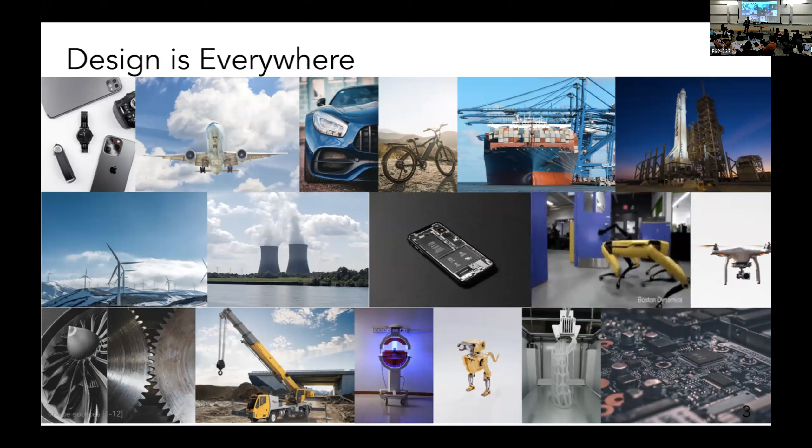If you look around yourself, you will see that you're surrounded by design, whether you took a flight to come to Boston, whether you're driving, whether you're biking here, if you use energy, you have energy solutions, wind turbines, batteries. All these products are created by someone who came up with a design for what it should look like, how it should function, and all the systems that go into place. A key question is, how are they designed and what role does AI play in it?

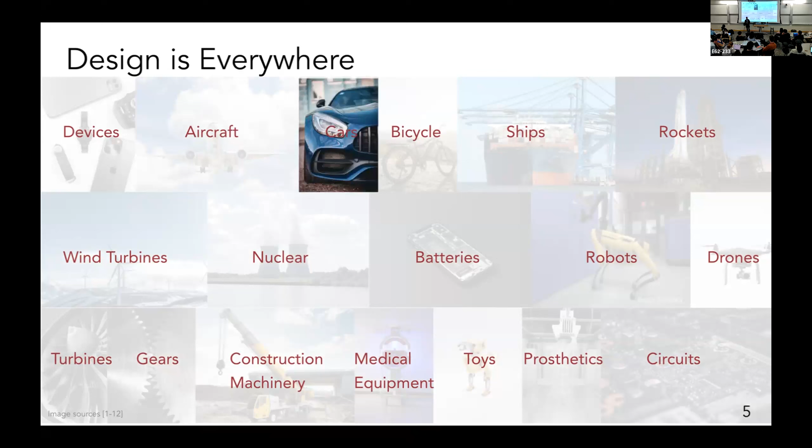So let's just take the example of one of these products, and I'll take cars, for example. I asked a friend of mine, Bill, how do you actually create cars in the industry? And the first answer was pretty much what we study in our design classes, the design process. You start with some market research, do early stage design sketches, then start modeling, simulation, go to the wind tunnel and test those products and iterate and finalize.

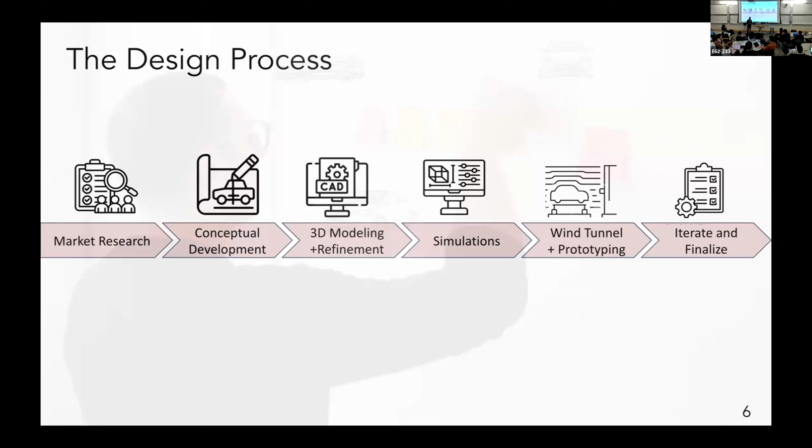But if you dig a bit deeper, Bill will tell you that the process is much more complex, and anyone who has done any serious design will relate to this: there's lots and lots of back and forth. In fact, in the car industry, they call this the devil's cycle. There's a good reason for that, because going from a concept to the product can take many years, 3 to 5 years in this case.

More importantly, because exploration is so expensive, every time you come up with a new sketch you'd have to really explore the design space, but people don't do that much. So they would tweak the design a little bit and use the ones that were there before. This leads to innovation loss, difficulty meeting requirements. And there is research showing that 70% of the life cycle costs of a product are decided by decisions taken in early stages of design.

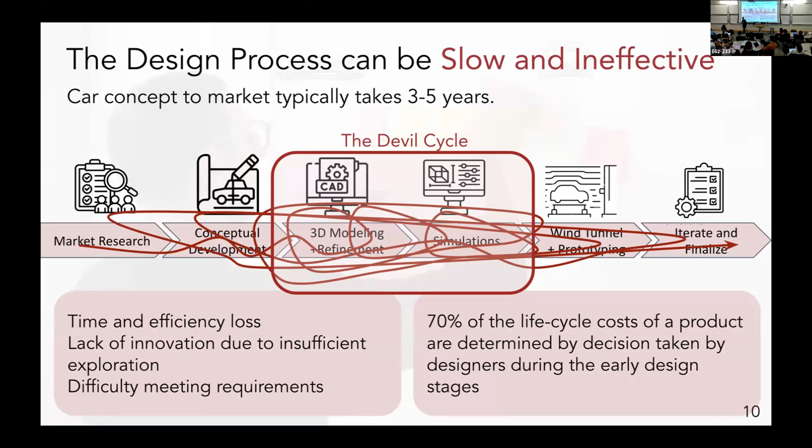And this is not just about the car industry. For any product we're designing, the early stage decisions we take have a huge cost implication, and exploration is expensive.

So since we are working on AI, our natural question is: how can AI enable humans to create better designs faster? This touches on a lot of sectors, from aerospace, automotive, energy, shipping. Some people would ask me, what is better? And this is critical because you have to define better. For someone it might be cheaper, for someone more sustainable, it might be faster, or other values like a better looking product and so on.

The more important thing is that these models are not new. Generative models have been around for decades: mixture of Gaussians, topic models, and so on. But what's new is that now we can learn much, much more complex distributions.

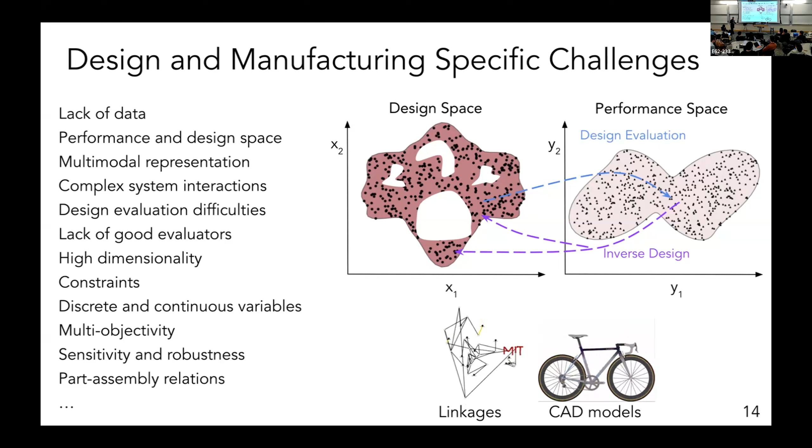There are other challenges like understanding engineering performance, what physics is at play, what the design space parameters are. Humans don't think in a unimodal way. If you're designing a product, you're speaking, you're looking at visuals, you're thinking in different aspects—multimodality and so on. So I want to go through some examples where, despite all the hype, we see promise and where work needs to be done for the next generation of AI to be capable for shape, design, and manufacturing.

I divide it into three parts. One part is AI helping humans solve problems that humans are already doing, and pretty much not using a lot of AI today. The second part is AI helping people solve problems where current models are good enough, but you can do much better. And third is where the current models can't even solve the problems, so we can solve problems that were not possible before.

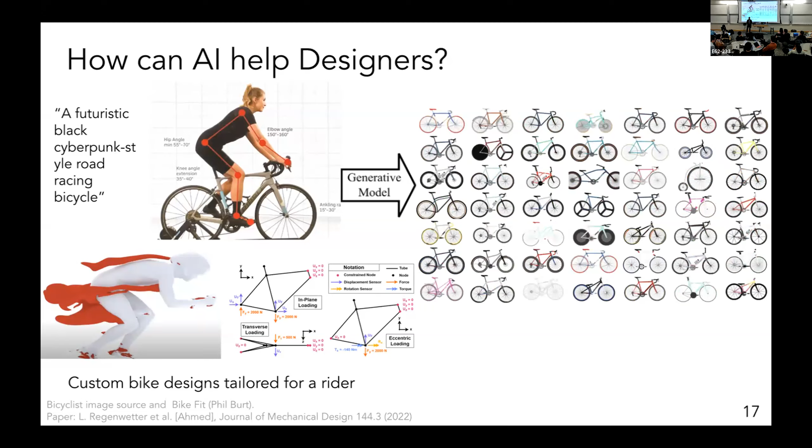So the first case is bicycle design. We collaborated with a company called BikeCAD. Globally, a lot of frame builders use this CAD software to design their bicycles. When we started looking at designs, we found that we wanted to enable AI to create designs for people, but it was not trivial because people have very diverse requirements. You might say, I want a bike which is lighter and more ergonomic, but also a black cyberpunk style road racing bicycle.

Here we are not generating images—these are CAD models, renderings of CAD models. So should I change the saddle height of my bicycle or should I change the color to meet these requirements, but also all the physics requirements? You want it to be stiffer, you might want it more aerodynamic, so we're running simulations. We started looking at it from a combined learning and optimization perspective, and multimodal learning plays a big role.

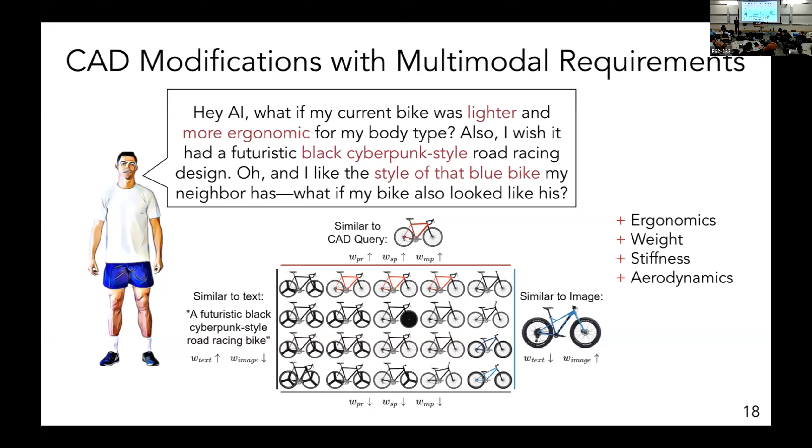The other thing we started looking at is, can generative models be an AI design assistant? When we talked to people, sometimes designers are lazy—they go to the CAD software and design a part of the CAD model, like the frame, and say just complete it, auto-complete it. So what we did was train models on past data.

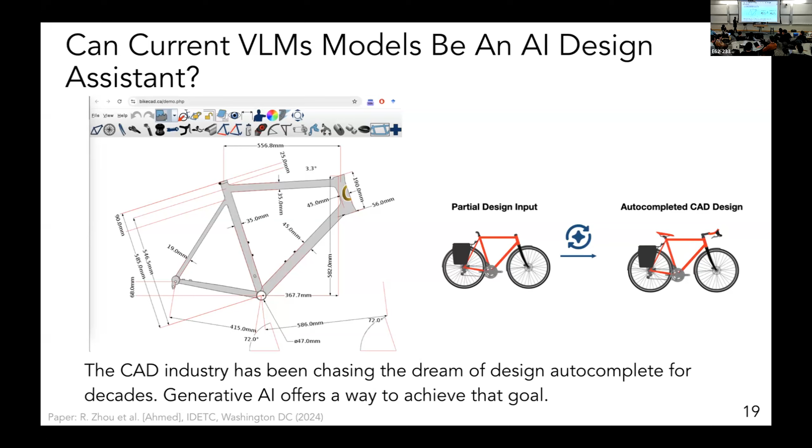These are diffusion models. They work on Excel sheets, where you imagine some columns are missing, and the diffusion models can fill in those values. They are also guided by the structure of the bicycle. With that, you can give incomplete bicycle designs, and this can complete 3D CAD models of different types of frames with exact measurements and so on. Once we have that exact parametric value, you can generate images out of those.

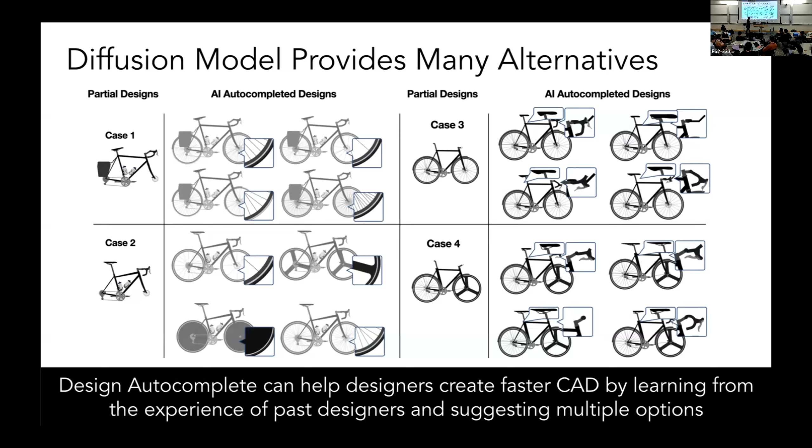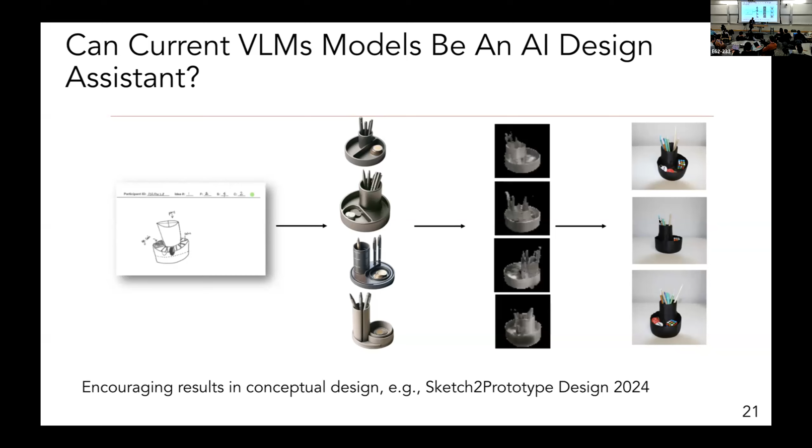Other use cases—thinking about how AI can help humans design, like people design sketches in our classes. We've shown some prototypes where you can go from a sketch to a physical prototype, by going from sketch images, to 3D models, and then correcting for manufacturing defects and so on. This is still early stage because I don't think the spatial understanding is there yet, but we already see some encouraging results.

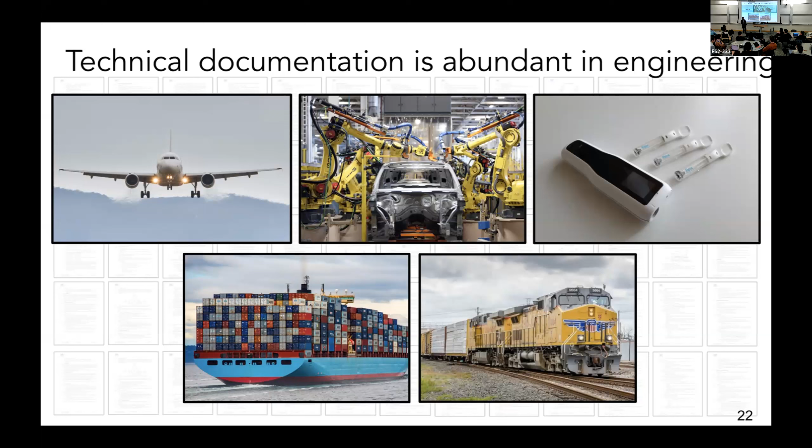The next thing—if anyone has done design, I think one important thing when we think of AI as a designer is it should be able to design and follow real world rules. How many of you have done a design where you had a thick rule book, where you had to go to rule number 1.3.5 and so on? Most technical documentation, whether in aerospace, automotive, medical devices, shipping, or trains, has hundreds of thick documents, and all those rules need to be followed when designing products.

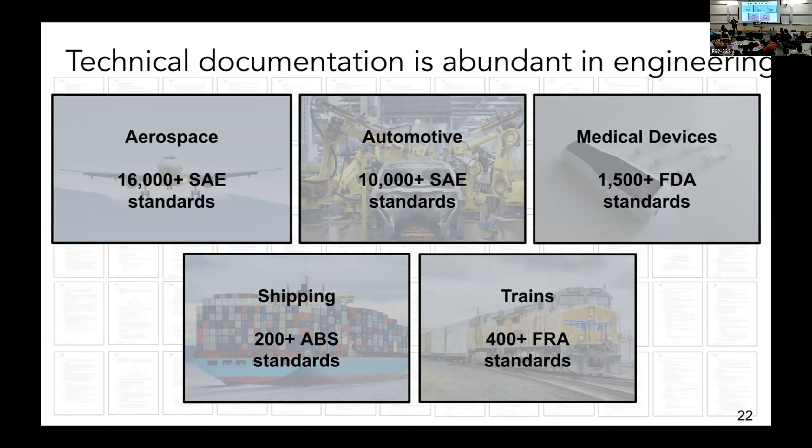So we asked ourselves, if AI is ever going to be good at this, it has to understand the engineering rules. Given a PDF of a rule book, it should understand that. And we found that there was no benchmark for this, so we ended up creating our own benchmark.

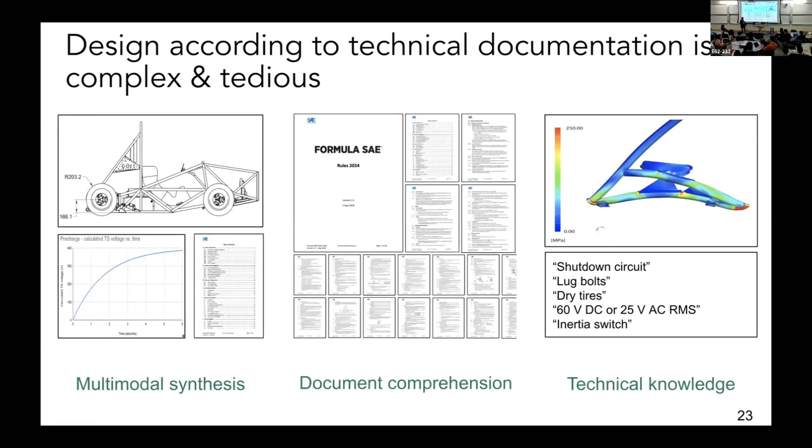We collaborated with MIT's motorsports team. There is the Formula SAE book, which is hundreds and hundreds of pages. It has both visual information and text information, so you have to really understand all the engineering drawings in it. We went out and compared common models, and now we've expanded it to GPT-4, Claude, Gemini, Llava models, and so on.

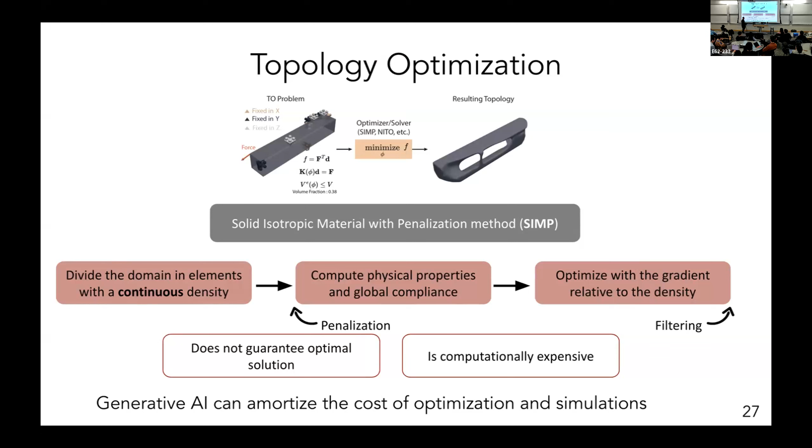With that, there's another set of problems, going from helping humans to solving engineering problems directly. In this case, I start with structural topology optimization, where we want to find good structures that are stiff, given some loading conditions.

What we've shown is that if we use data-driven methods, we can collect a lot of data and amortize the cost of optimization. It's expensive early on, but then you don't have to do optimization from scratch over and over again, since normally every time you run an optimization, it forgets everything that happened before. Using that, we found huge speedups, 2,000 times faster.

While being reasonably accurate, 99.6% accurate. Anyone who has done Bayesian optimization knows it's used a lot in experimental design and so on.

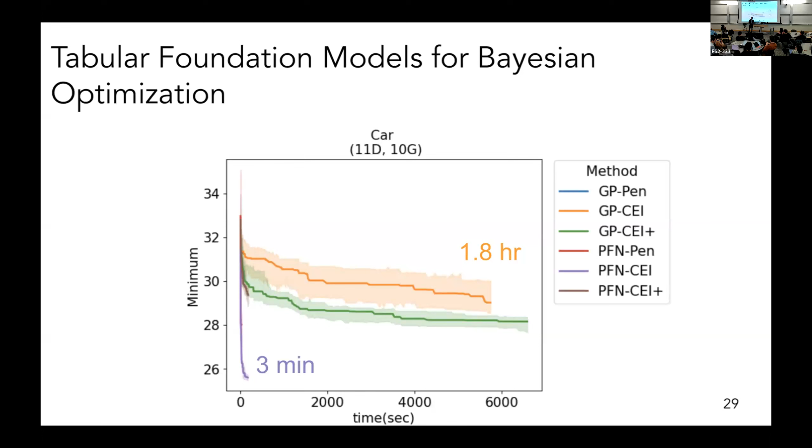There, we also saw that tabular foundation models can lead to huge speedups. In this case, this is a car crash problem. Gaussian process-based Bayesian optimization takes 2 hours, and we can solve it in 3 minutes with a better optimal solution. So this shows that these models aren't just there to give you answers, but can support very fundamental things like Bayesian optimization, topology optimization, and so on.

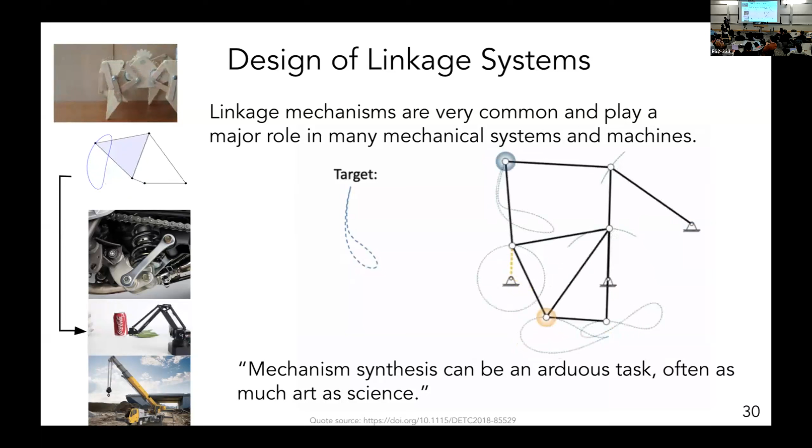The third problem, which I personally like a lot, is around linkage systems. If you're designing a robot or your car wiper door, this is my student trying to design a linkage system. You draw a curve and ask a mechanical system driven by a single motor to trace that curve. This problem is extremely challenging.

And I know it's challenging because we've looked at industrial solutions and they can't solve this problem. For the last 3 years, I've run a contest in my class where students draw some characters. This year students had to come up with a linkage mechanism that can draw these curves.

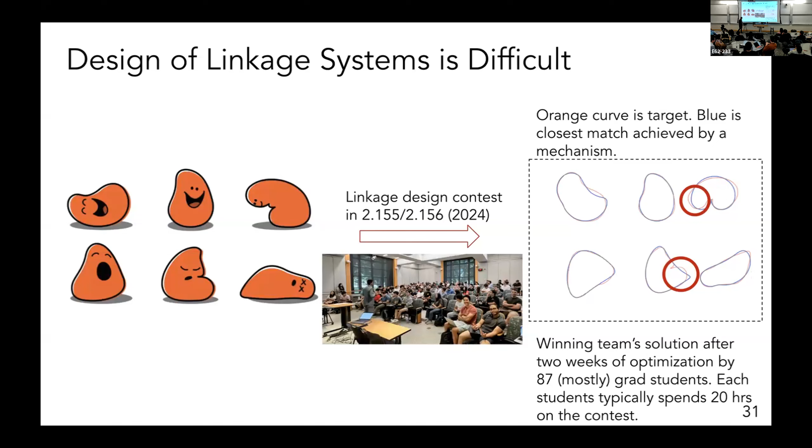The winner, after 2 weeks of work, gets pretty close, but still isn't capturing very fine features. This is 87 MIT students working for 2 weeks trying to solve this problem using optimization methods. So it's a fairly hard problem.

From a research perspective, we created our own simulator, 800 times faster than what existed before, and a data set with 100 million mechanisms. With that data set, using contrastive learning to learn joint representations in space, we can show the problem can be solved much more accurately, 57 times more accurate, while being 165 times faster. So instead of taking 45 minutes, now it takes 15 seconds.

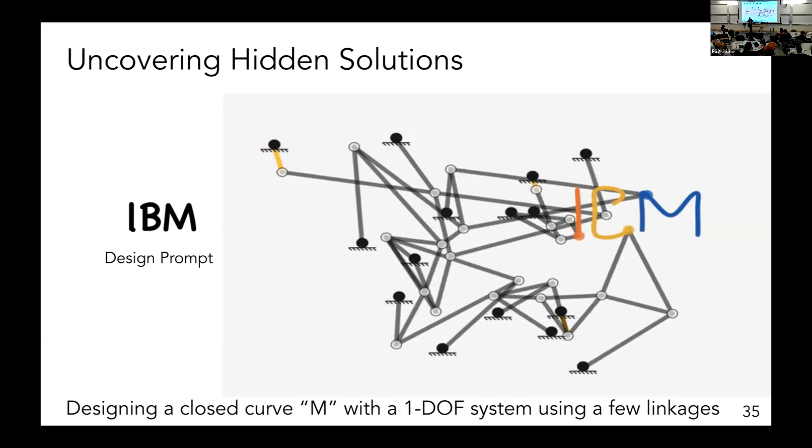So you draw a curve and get a physical mechanism that you can actually manufacture. And you can guess who funded the work. In this case, we can write much more complex things and say give me a mechanism, and within 15 seconds you get a solution.

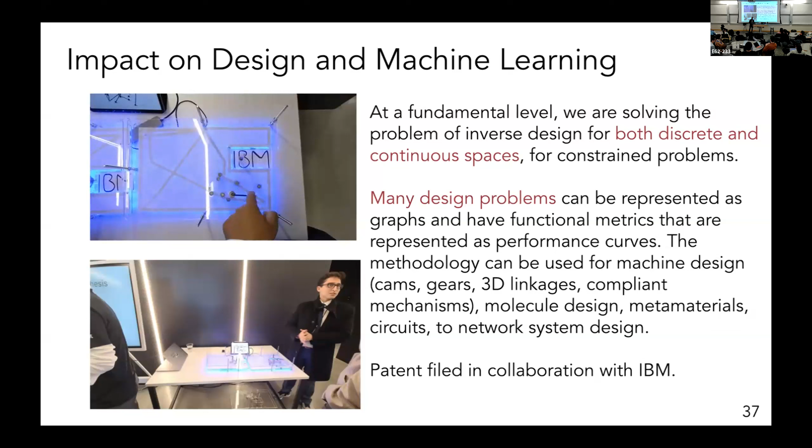This is a problem which has mixed representation. It has a discrete structure and continuous values, and a lot of engineering and systems engineering problems have that. Going from compliant mechanisms, molecule design to network system design, the methods are actually quite broad. In fact, we are using it in a DARPA project right now for designing turbine blades, and we've been looking at other applications too.

I want to wrap up with this key idea: what is holding us back? What are the key challenges if you're working on engineering systems? The biggest bottleneck right now is that modern AI is sitting at 10 billion to 10 trillion data set sizes or tokens, however you measure it, while in engineering design, if you're lucky, you get 100,000 or 10,000 data points, and you start feeling very lucky.

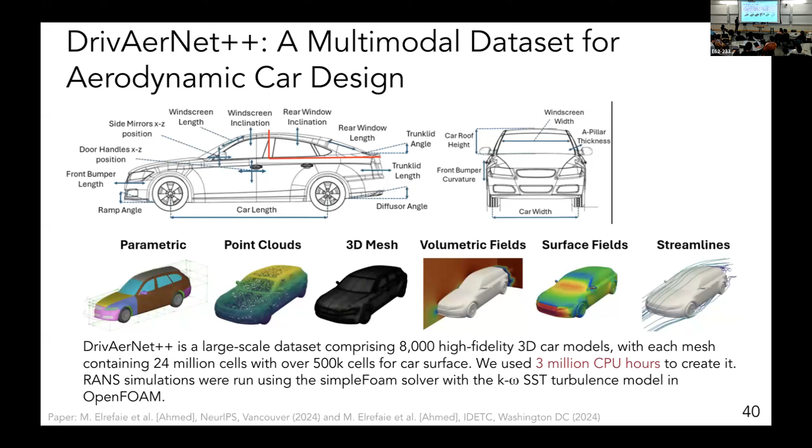So we have to bridge this gap by either creating more datasets, which we have done. We created a dataset last year which is one of the largest in the automotive industry, and it's being used by many companies already, with high fidelity simulations using 3 million CPU hours to simulate cars and the entire 3D flow fields. But also, this is a community effort, and you have to think about how much data is there and what data you can leverage, like synthetic data, which is a very promising approach.

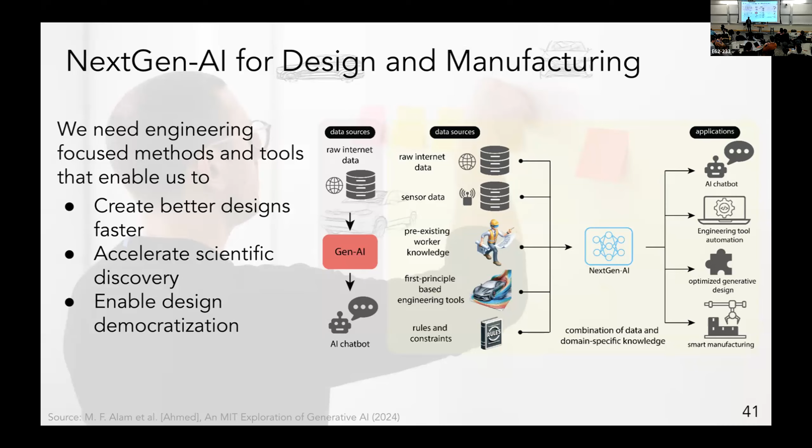So for thinking about the next generation of AI for design and manufacturing, there's a lot to consider: how we can create better designs, tap into worker knowledge, scale up compute for some of these challenges, and enable design democratization. What is design democratization?

I asked generative models like ChatGPT to write a poem about kinematic designs, and it writes this: 'Robotic arms with joints so fine move with grace in a straight line. Machine learning is the key, it seems, to design them with great esteem.' Great quality of poem, given my standards of poem writing.

So the question is, how can we get to a stage where we have serious generative AI models help novices and experts in understanding design requirements, preferences, simulating, prototyping physical products, and producing manufacturable designs? Not just for car designs, but for many products out there, where the design cycle can be significantly accelerated or create better products.